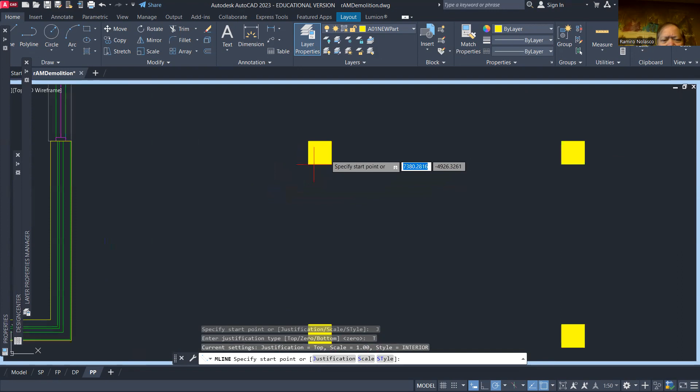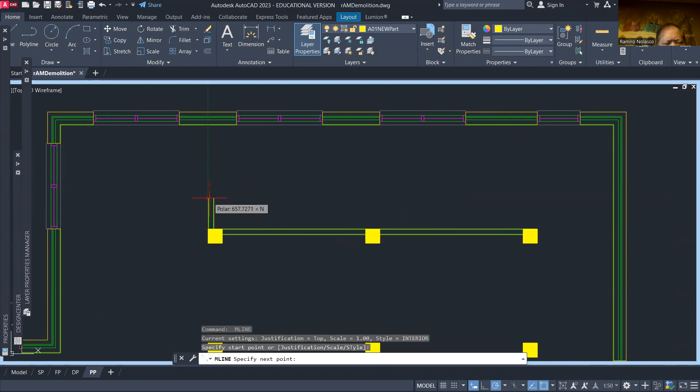Then we start our ML multi-line for the interior. That's our first wall for the new partition, and that's our second wall. From here we'd like to also use top and make this go up to the metal stud.

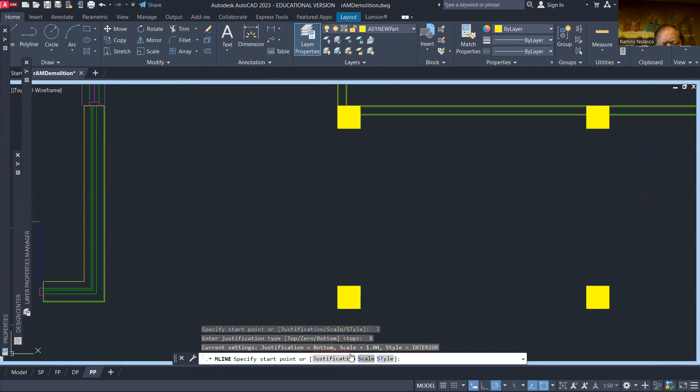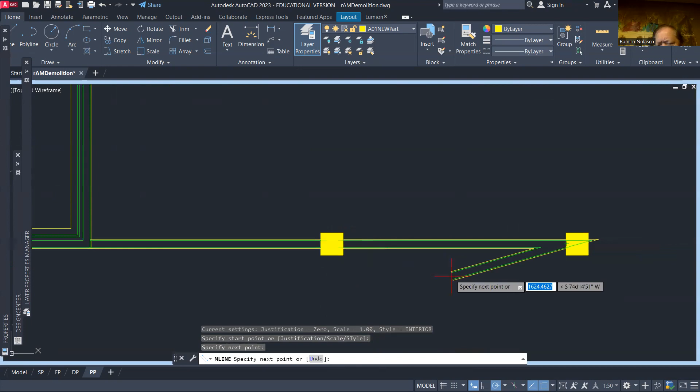Then we'd like a wall across. For this one, we'd like to use justification bottom. So from here, we'd like to maybe start a line to that, so the metal studs touch each other, and then here to its perpendicular. Now here the justification will be set back to 0, so it will go to the middle, aligned to that first one. This one will be 0 as well.

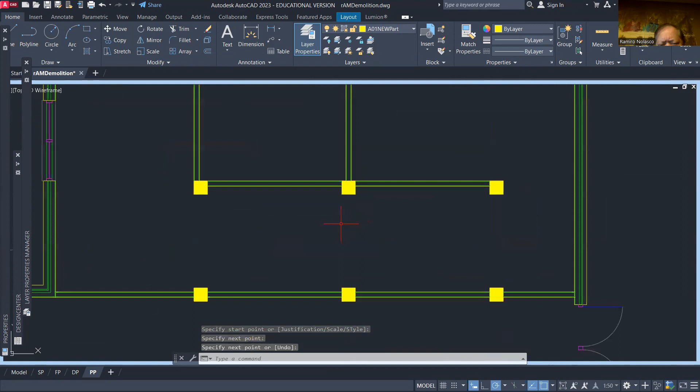Then another right here. That's for the first half. We're going to now put one here. Justification 0 is good. And put a wall up there, and then another wall right here.

From here, we're going to add a wall, right here from the middle. We'll say M line, justification 0. So we'll add one wall here, and we'll add one maybe right here, so we'll have a door here.

Then from the middle, we'll put the break right there. We'll say M line from middle there. And likewise, we'd like to add maybe one right here. One wall there, so we'll say M line.

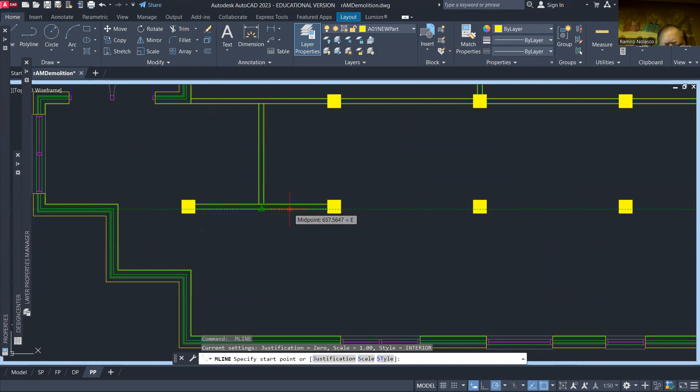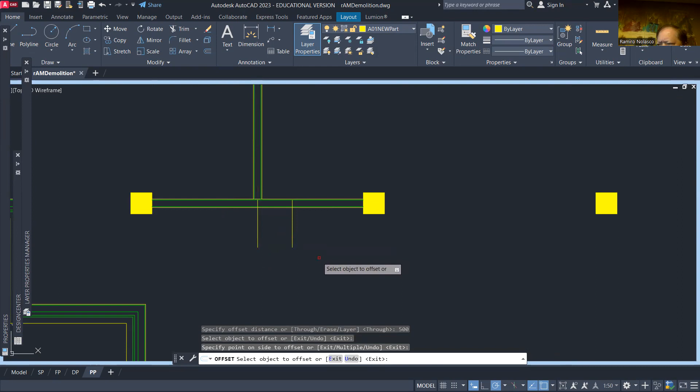For this one, I want it to be a little bit off, let's say by 0.5. So I'm just going to create a line first and offset that by 500. That's where I'd like to have my line wall, so I can start the M line command and start there and add a wall right here. And I can delete those lines since I don't need them.

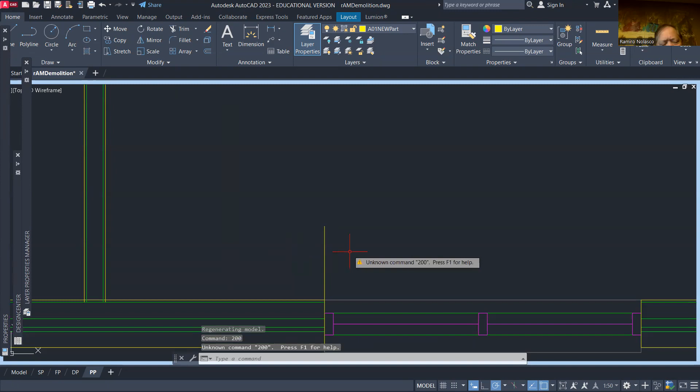Now from here, I'd like to start a little bit off, let's say by... so let's say 100 or 200. Let's say 200. Offset by 200.

And then I'll start my ML multi-line. That one will go... it's a little bit tight, so maybe I'll go here by a thousand.

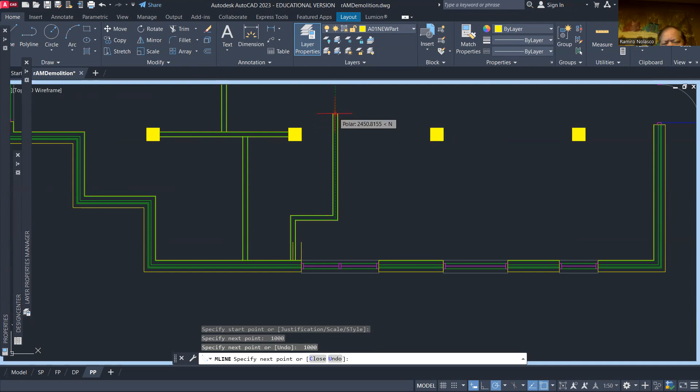Okay, and then go out by, let's just say, another thousand. And then go up and go beyond this. So this will be about, let's say here, not too far. That will be 2,500.

And then from here, I'll just go by, let's say this much, which is about 800. And then I'll go down to about the midpoint, apparent intersection, and then to the midpoint.

Then from here, I'd like to make a line connecting this, closing this up. So ML from midpoint to the metal stud.

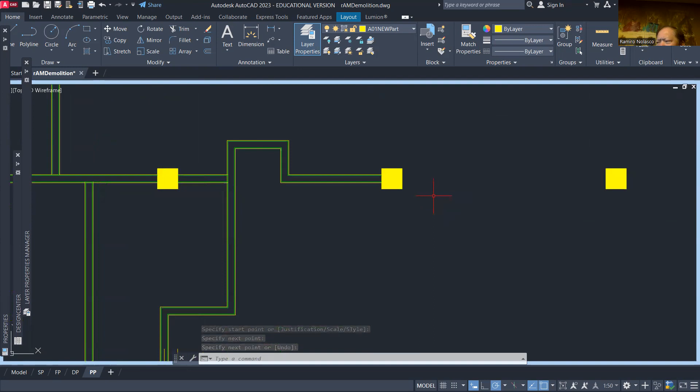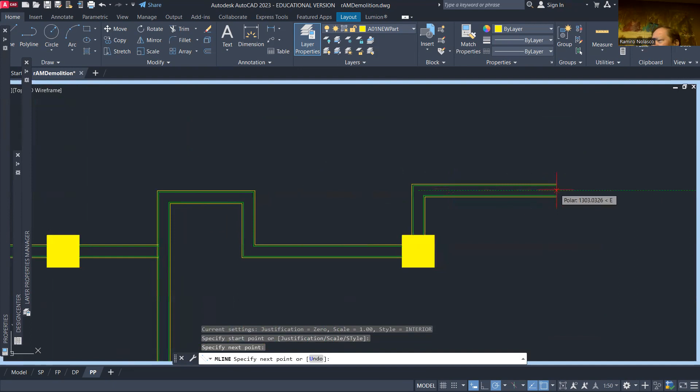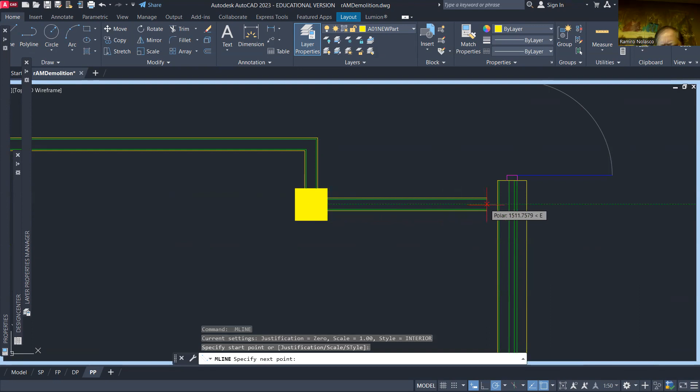And then from here, I'd like to go up, I'll just align it to this. So I'll do ML from here to apparent intersection, which is over there. I might need to lower that so that they are aligned, and just go to the apparent intersection right here, and go down. Then from here to the midpoint, I'll close this up, going to the metal stud.

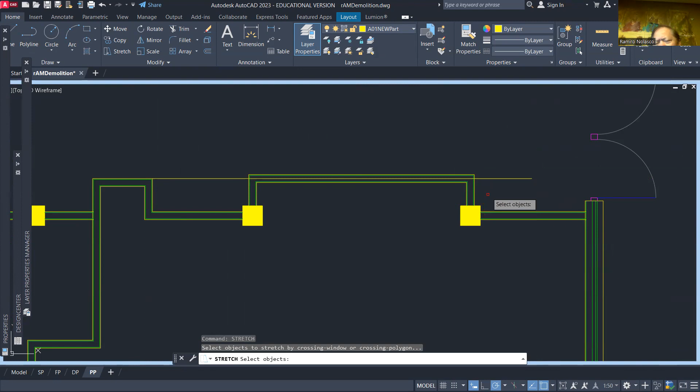Now this one looks like they are not aligned to each other. I'd like to align them, so I'm just going to create a line and say stretch, STR, stretching this from here to there so that they are aligned. So there's maybe a nice display I can put here, or a door, whichever.

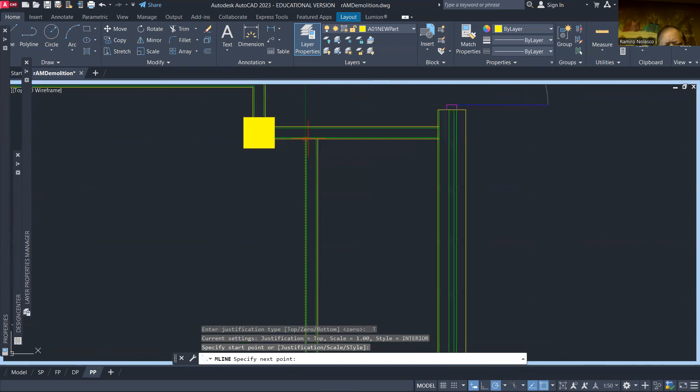So that's basically the walls that I need. I think I need one more here, so let's add a line. For this one, I might need to start here and, sorry, multi-line, justification top, and I'll just place it here to, let's say, there.

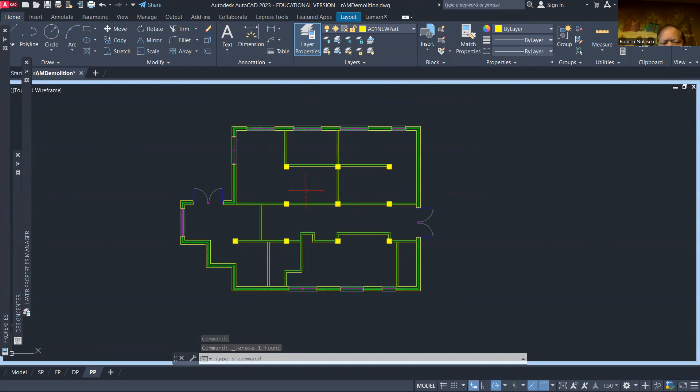So that's my initial plan. I still need to finish this part, but let me delete these lines right here since I don't need that, and add maybe a wall right here. So I'll create another line.

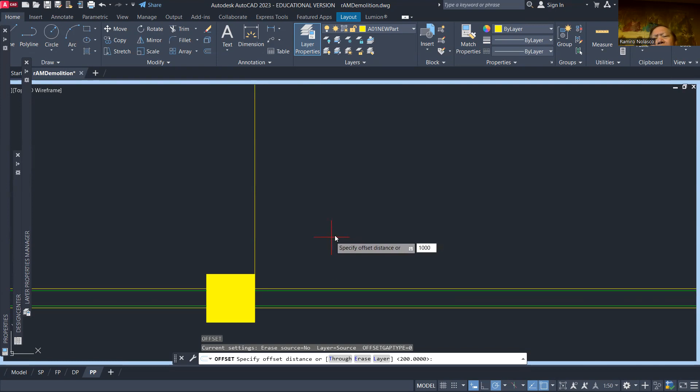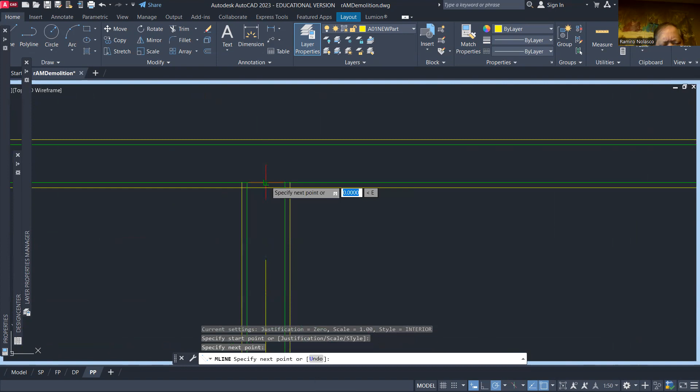So up to there, and then offset that by 1,000, so 1 meter. This is where I'm going to put a multi-line, justification 0. From here to the metal stud, and delete that.

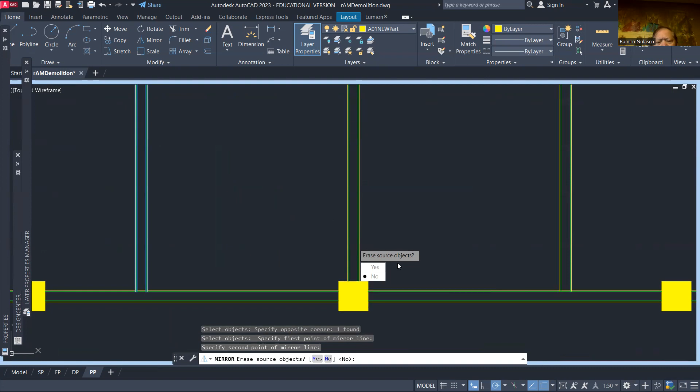And it's good. Then maybe just mirror, MI, mirror this from midpoint, and delete source object — no, so I created a copy of that right here. Then we'll work with our fixtures next so we know where our pipe chase will go. So that's my basic floor plan partition.